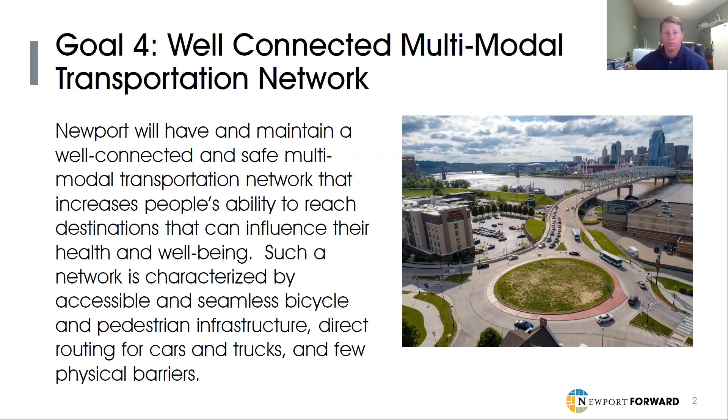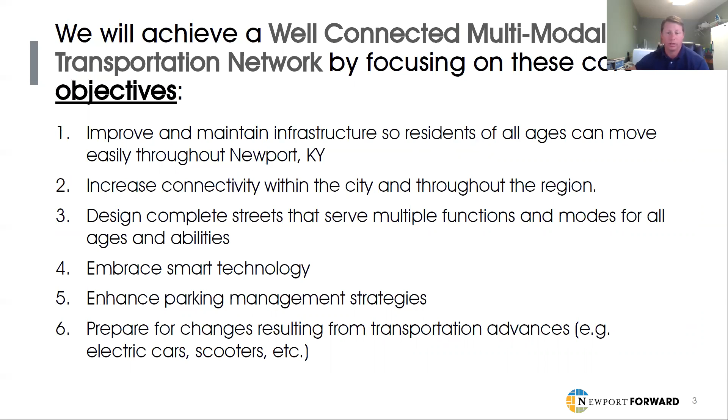We'll achieve a well-connected multimodal transportation network by focusing on these core objectives: improve and maintain infrastructure so residents of all ages can move easily throughout Newport, increase connectivity within the city and throughout the region, design complete streets that serve multiple functions and modes for all ages and abilities, embrace smart technology such as adaptive traffic signals and real-time traffic monitoring, enhance parking management strategies such as remote parking and shuttle service, as well as time period restrictions, and prepare for changes resulting from transportation advances like electric cars, scooters, and autonomous vehicles.

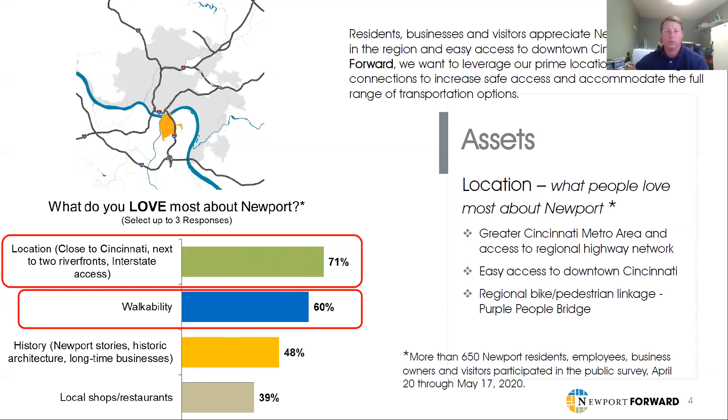In a recent survey that included more than 650 participants, it was asked what people love most about Newport. Location and walkability were the top two responses at 71 and 60% respectively. We want to leverage Newport's prime location and existing connections to increase safe access and accommodate the full range of transportation options. Newport infrastructure is everywhere around you and you use it every day.

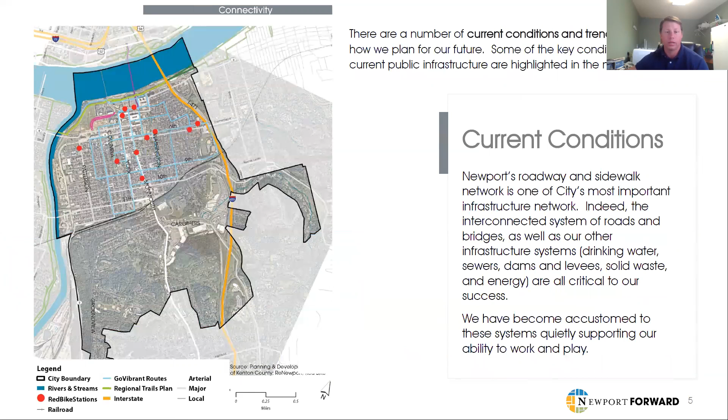The interconnected system of roads and bridges, drinking water, sewer systems, dams and levees, and energy are all critical to our success. We have become accustomed to these systems, quietly supporting our ability to work and play. However, our infrastructure networks are aging and struggling to perform as necessary. Newport has been around for 225 years. The public road system and supporting transportation facilities are often the most visible service that is provided by a municipality.

However, the City of Newport is also the local sponsor for the city's flood protection system. The city maintains approximately 46 miles of roadway through a systematic annual street maintenance program. The city is also responsible for maintaining the flood protection system constructed in 1951 that consists of 2.39 miles of walls and levees with 6 closure structures or floodgates and 3 pump stations.

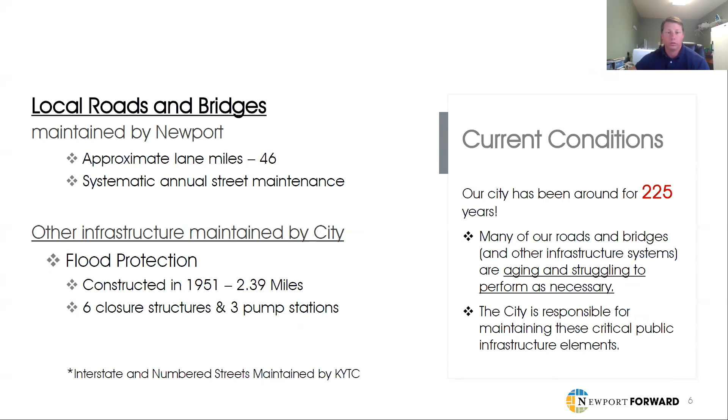Newport is also served by an extensive but often hidden utility network that includes sewage facilities, water supply, storm water control, pipelines, energy, and telecommunication services. Sanitation District Number 1 is responsible for wastewater and stormwater infrastructure. It should be noted that several areas within Newport include combined sewers, in which during wet weather there are overflows into the Licking and Ohio rivers. The Northern Kentucky Water District is responsible for the city's drinking water. Duke Energy provides gas and electric service to Newport, and transit service is offered by the Transit Authority of Northern Kentucky.

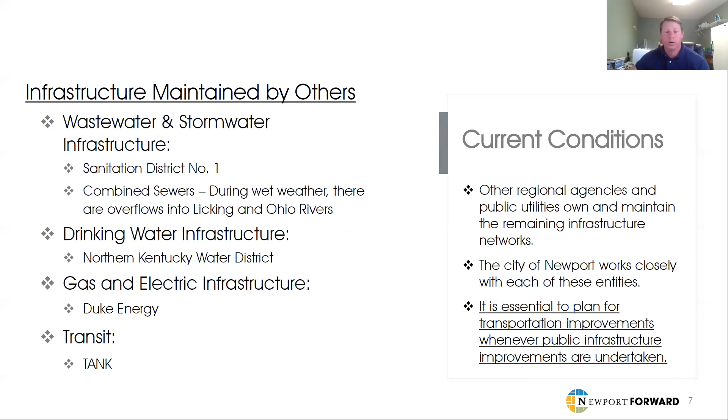The infrastructure systems that connect Newport are an integral part of our past, present, and future, evolving to serve the needs of our community. These systems provide a stable foundation for economic growth and community safety. It is essential to plan for transportation improvements whenever public infrastructure improvements are undertaken.

Now on to roadway safety. Reducing the risk of crashes that cause death or injuries and providing for the security of transportation users is important to the city. Between 2015 and 2019, there were 3,814 crashes that did not occur on I-471 or within a parking lot. There were 3,430 multiple vehicle crashes, and 2,766 occurred during daylight hours, while 3,076 involved dry pavement conditions. Of these crashes, 4 resulted in a fatality and 249 crashes resulted in an injury.

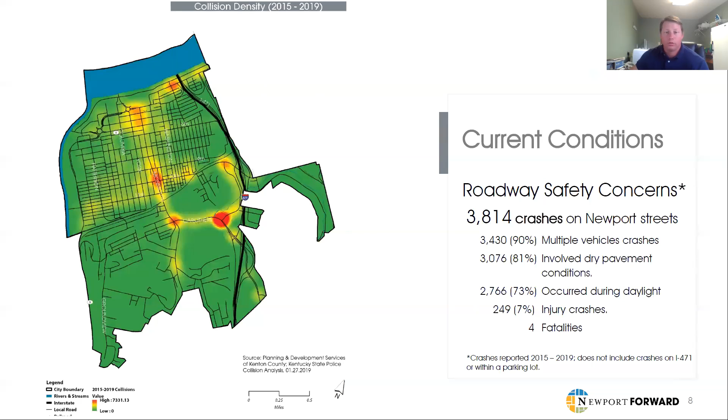There were only about 7 crashes, or 0.9%, that involve pedestrians each year. An additional 3, or 0.4%, crashes involve bicyclists. Pedestrian crashes make up only about 1% of all crashes. However, they comprise about 17% of the crashes that resulted in an injury.

It is important to note that these numbers represent the number of crashes that are reported. It is possible, if not very likely, that a number of crashes that involve pedestrians and bicyclists go unreported when they do not result in injury or significant property damage.

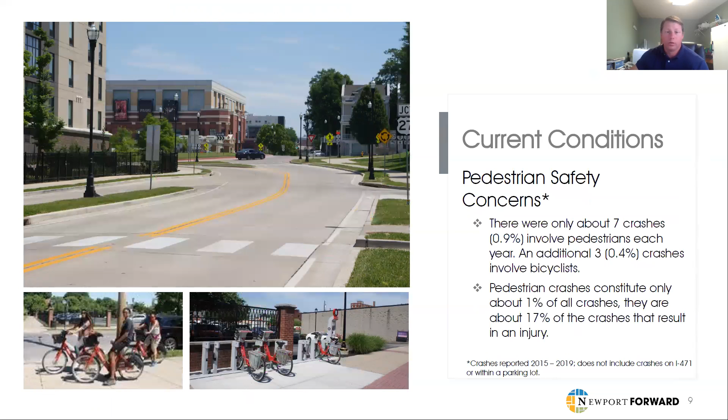In the same survey previously mentioned, it was asked, what are the most important considerations for future transportation? The top two responses were to provide dedicated bike lanes and trails and traffic calming, at 53% and 38% respectively. These findings show that the top priority for future transportation improvements is providing infrastructure to make it easier to bike around Newport.

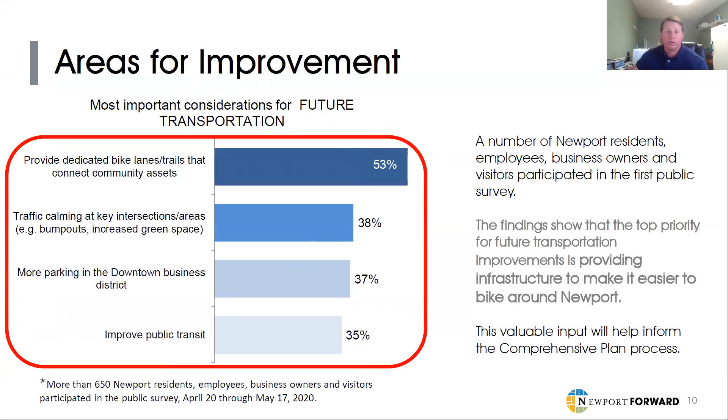Based on the input the steering committee has received so far, the following place-based focus areas related to connectivity and transportation will be further explored during the planning process. There are several east-west corridor opportunities that can be evaluated.

A Riverside Boulevard could be used to promote the redevelopment of Newport on the Levee to include multimodal transportation enhancements, provide a bike pedestrian connection to the riverfront, and serve as a transition zone between higher use new riverfront development and traditional Main Street urban housing.

5th, 6th, and 11th Streets are not continuous east-west corridors between Kentucky 9 and I-471. However, 10th Street is. 10th Street intersections are mostly stop controlled, whereas 11th Street intersections are mostly signal controlled. And 5th Street is one-way eastbound from Central Avenue to Park Avenue. The functionality of these corridors needs to align within the context of the community. There is a need to establish an east-west bike pedestrian corridor within Newport as well.

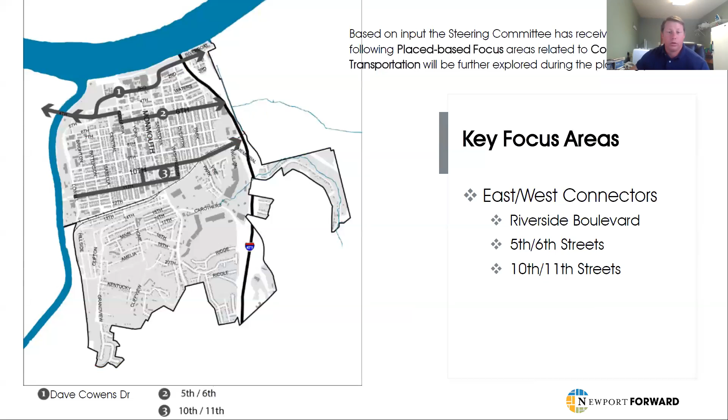The conversion of one-way streets to two-way should also be considered. One reason is because one-way streets increase travel distances, as most one-way systems do not allow direct travel to every destination. Another reason is to create a certain degree of congestion to reduce speeds.

Does downtown feel exciting? Are there lots of people? One-way streets are so efficient at moving traffic that streets may feel empty. A consequence to this is that with empty streets, operating speeds tend to be higher. Therefore, in downtown, particularly in the shopping district, there needs to be a certain level of congestion so that the district appears to be busy.

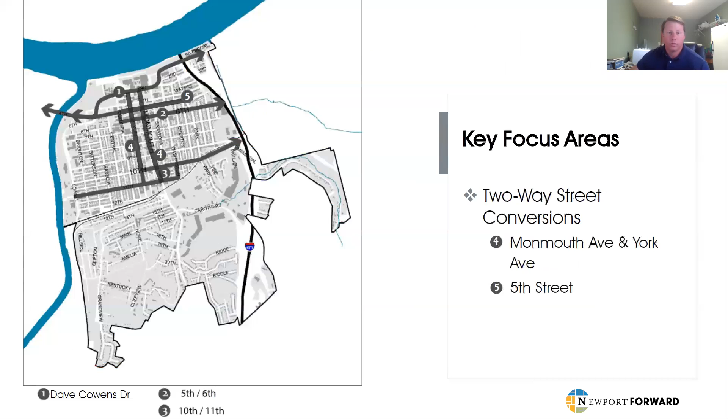Another key focus area is to establish alternative transportation corridors. Investing in bicycle and pedestrian facilities creates opportunities for people to exercise. This helps reduce obesity and the risk for developing costly chronic conditions such as diabetes and cardiovascular disease. Saratoga Avenue is a good candidate to include a bike boulevard as it provides a direct connection to the Purple People Bridge and was initially evaluated under the Connect NKY project led by Tri-State Trails.

Conversion of US 27, or Monmouth Street, into a smart corridor is also being evaluated by several Northern Kentucky cities. Smart Corridors is a technology-based initiative to improve multimodal transportation operations in key arterial corridors such as US 27. Smart corridors typically include items such as vehicle detection systems, traffic control, signal control systems, and transit management systems.

I hope you found this information helpful, and I appreciate your time, but now it's your turn. What do you think Newport's primary transportation-related focus should be over the next few years? What can Newport improve to achieve a safe, connected network of roads and sidewalks and bikeways and trails? Did we miss anything? Please feel free to reach out to me or someone on the project team. I look forward to hearing your thoughts on how to provide a modern, safe, and well-connected multimodal network for Newport now and into the future.